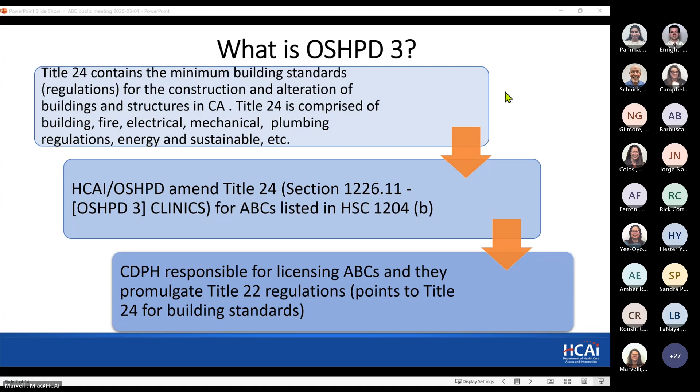Okay, I'm gonna turn this over to Clara Wu to recap stakeholder engagement so far. Okay, thank you. So we had 2 meetings with ABC representatives earlier this year, 2025. The first meeting occurred on January 7, 2025. During the meeting, we discussed ABC environments and the challenges faced building an ABC licensed by the CDPH.

We also discussed challenges faced with compliance with Title 24, Title 22, and the standards for birth centers set by the American Association of Birth Centers. OSHPD developed a Title 24, Title 22 comparison table, which we call the ABC requirement comparison table.

During the second meeting with ABC representatives on February 4, 2025, we reviewed the ABC requirement comparison table and discussed regulations that can or cannot be changed. We also discussed opportunities for a guidance document and ABC checklist to help the ABC providers and the local jurisdictions.

And we also conducted an email survey to birth center owners. The results of this email survey will be discussed shortly in the next slide. Thank you. So on February 19, 2025, we sent an email with 6 questions as displayed in this slide to 31 birth centers. We received only 5 responses. I am going to just go over a couple of the questions and results, and we will make this slide deck available after this meeting, so you may review the details of this result later.

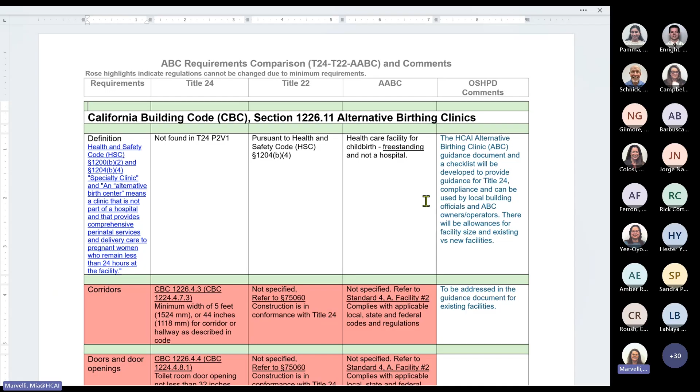And that's another part of our discussion today, how the guide can help assist design professionals and ABC operators and possibly local jurisdictions with enforcement for these regulations. I don't think I mentioned this earlier, but for primary care clinics and alternative birthing clinics, the local jurisdiction actually has authority for plan review, permitting, and inspection for certification of occupancy. OSHPD does not. So we try to assist where we can to clarify the regulations for the local jurisdiction.

Let me double check here. I'm going through my notes. Double checking some things.

So during our meetings with the ABC interested parties, and after reviewing Title 22, which again is the CDPH licensing requirements, and the American Association of Birth Center guidelines, we found that there were requirements that could be amended, such as the size of the birthing room, cleanup room, nurse call, lighting, garbage waste, medical waste, those types of things. We'll talk about those in a minute.

Additionally, when all of the clinic regulations were developed years ago, the Facility Guidelines Institute for Outpatient Facilities was used as the basis for the regulations. The FGI guidelines are nationally recognized standards that many states adopt. While we are not required to use FGI guidelines for outpatient facilities, they are a good basis for the building standards. And we do use those guidelines for the hospital regulations.

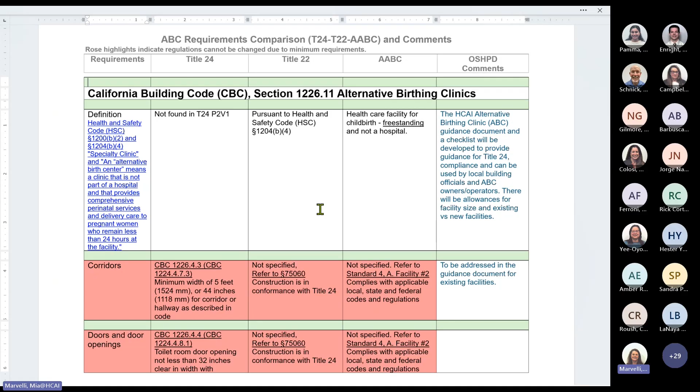I'd also like to note that a couple of the architectural features that you'll see today overlap with the other disciplines, such as lighting and plumbing fixture counts, so there'll be some overlap discussion on that. For the sake of time, I'm not going to go through all of the items, but I encourage you to comment today or send in specific comments by May 31st. Later in the PowerPoint, you'll see an email address to send those comments to. I'm going to scroll down here to windows.

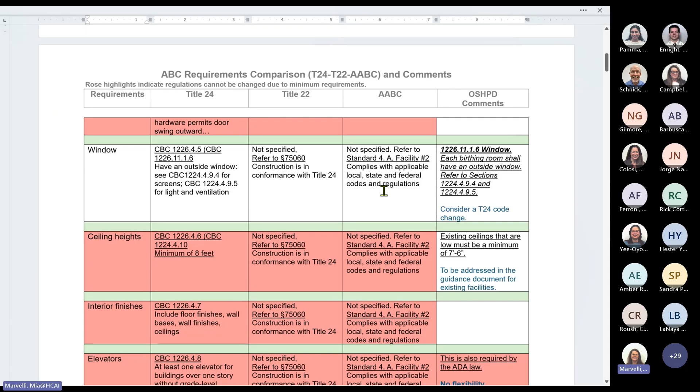So while we were comparing the various requirements, the need for a window in a birthing room may not be necessary, and we're going to consider this for a code change in the next code cycle. Later on in the presentation, I'll explain the code cycle. We also recognize that the regulations need to have some minimum requirements for new construction and repair. That said, we also understand that it can be challenging to remodel an existing facility to meet those minimum requirements.

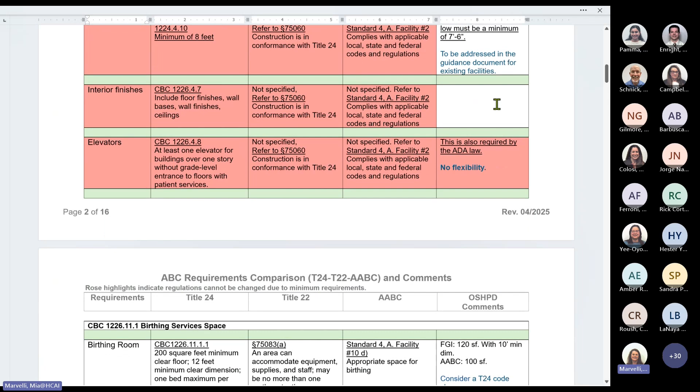So similar to the clinic CAN, which is on our website, OSHPD wants to issue a guidance document for alternative birthing clinics that has similar intent to allow some flexibility for remodeling existing facilities. A slightly lower ceiling height is one of the items that would not impact patient safety or care, so it could be considered somewhat flexible. Interior finishes and elevators is not something we'll touch on. Interior finishes is basically where you can and can't have carpet and what type of finishes on the walls, ceilings and floors is required for infection control.

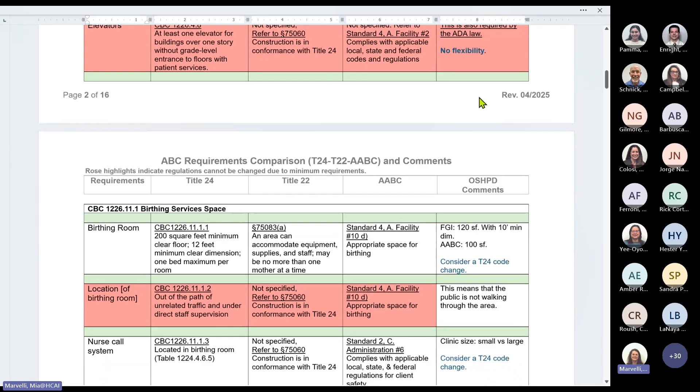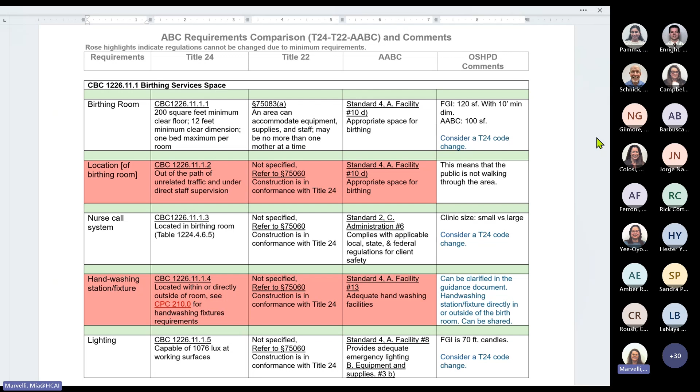Clara mentioned this already. Birthing rooms is obviously one that we will consider a code change for. So currently the regulation says a birthing room needs to be 200 square feet minimum with a 12-foot clear dimension. But Title 22 just says an area that can accommodate equipment, supplies, and staff, which is pretty open-ended. And then the AABC says an appropriate space for birthing. So when we looked at the FGI standard for birthing rooms, they recommend 120 square feet, which is quite a bit different from 200 square feet. So we will consider a code change for the birthing room.

To 120. Yeah. Location of birthing rooms. This really is just meaning that it needs to be out of the path of unrelated traffic and under the direct supervision of staff.

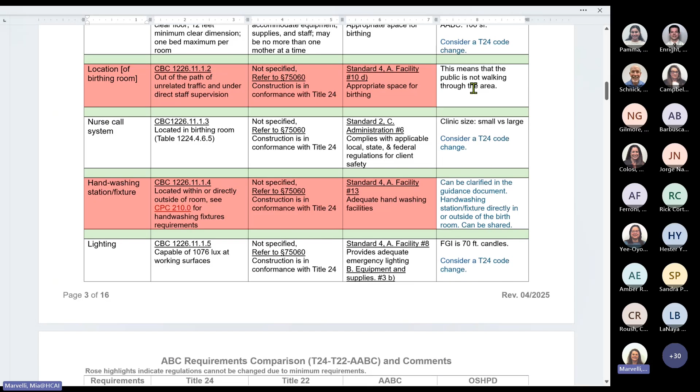Nurse call is another item we're going to consider as a code change. We recognize that a lot of these birthing centers are quite small, maybe 2 to 3 birthing rooms, maybe less than that. And so in our discussions, we're looking at perhaps we can have some sort of a communication device provided in case a patient is in distress, or if one of the midwives needs to call someone else for assistance. But it doesn't necessarily have to be a complete nurse call system like many of us have seen in a traditional hospital patient room.

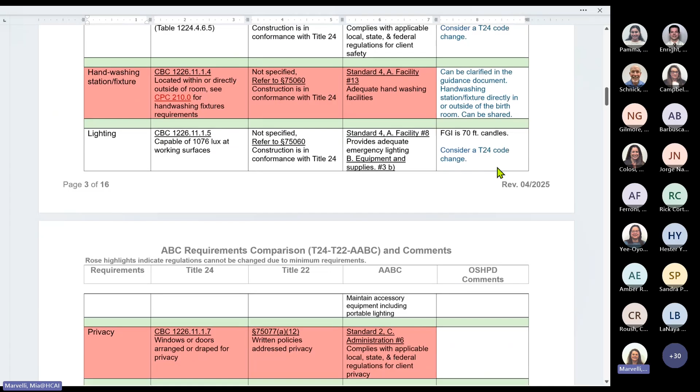Lighting we'll talk about a little bit later. This is another one where we may be able to reduce the foot candles to 70 rather than 100. Privacy is another item that just means you have to design things in a way that you're not exposing the birth room to an open area. Newborn care area is a carryover from FGI. And this area is actually optional, so we can clarify this in a guide.

And then exam rooms are not required in an ABC. And there's a lot of questions about consultation rooms. Obviously, an exam room could be used as a consultation room. But what we don't want is, if someone is only going to provide a consultation room and not have an exam room, we wouldn't want to have a higher standard for a consultation room. So we need to look at that carefully.

There's a requirement right now for a nurse station, but there's room in the code that this does not have to be a standalone nurse station. Sorry, I jumped ahead there. Oh yeah, right. There's a lot of areas that can be combined, such as a nurse station, reception, outpatient waiting room, medical records. All of that can be combined into one area if needed, and that can be clarified in the guidance document.

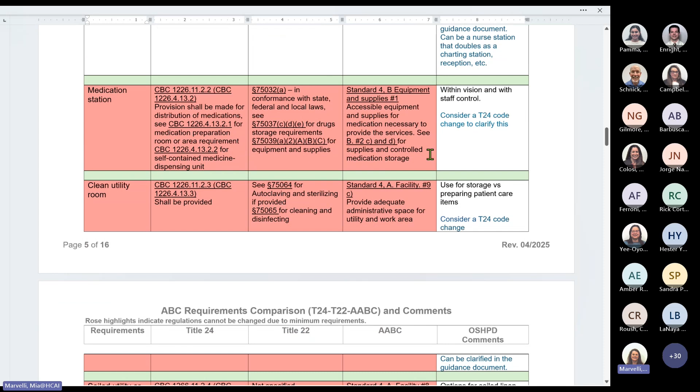Then there's a lot of support services like clean utility, soiled utility, garbage, soiled waste, medical waste, and trash. There's also offsite laundry and housekeeping. These must be separated to minimize the risk of cross-contamination. This includes separating clean and dirty areas. That said, if a small amount of housekeeping is needed in some of these smaller centers, then using a cabinet or a closet is fine. Same for clean utility and soiled utility. These can be small areas as long as they are separate areas.

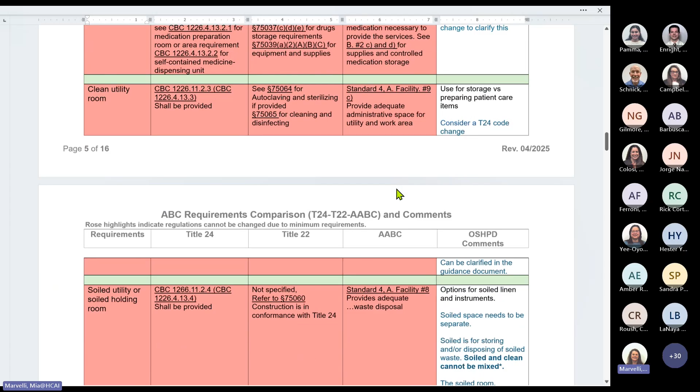Let me scroll down a little bit more. I'll hop back to crash cart in just a second. There's also requirements for ice making machine, nourishment areas, and staff break rooms. These can be combined and doubled as a staff break lounge. The ice making machine can simply be an ice maker in a refrigerator. We are looking at amending the public phone and drinking fountain requirements as they are a bit antiquated.

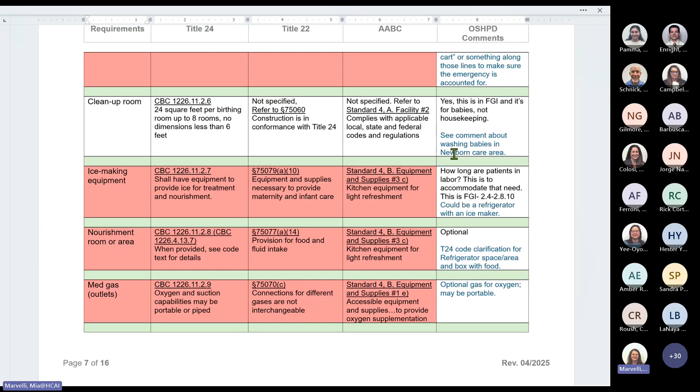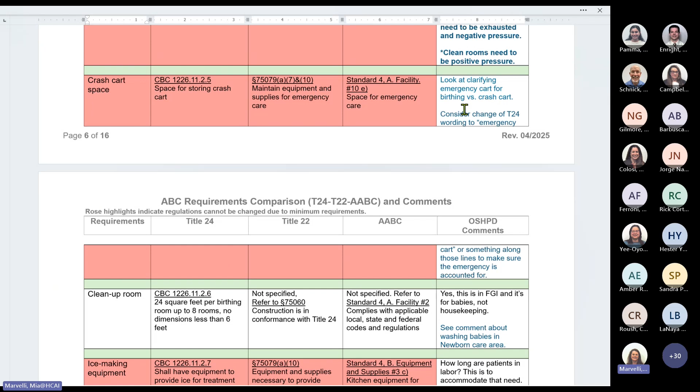I will hop back up here to crash cart. We've had some discussions, even though this is an orange, I think there's an opportunity here to make some changes. We can better clarify this as not like a crash cart in a hospital. What's needed is some sort of area where there's emergency equipment if needed.

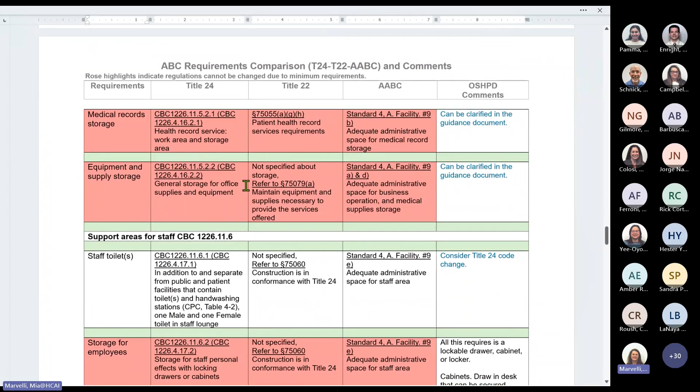So that gets us down to, we've talked about general support areas. I lumped those together. I'm scrolling down to the end of the architectural features. Next is mechanical. What I want to do now is open it up for discussion on any of the architectural features. And then we'll get into talking about mechanical, electrical, and plumbing.

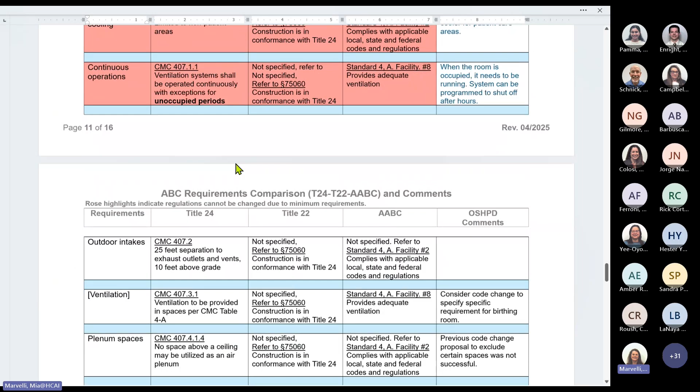Hi, I'm Larry Enright, Senior Mechanical Engineer in the BSU. I'll provide the plumbing and mechanical overview. So just a quick intro. OSHPD includes amendments for plumbing and mechanical to the model codes to make the California code related to healthcare facilities. Many of these amendments are based on guidelines either from FGI for plumbing or ASHRAE 170, ventilation of healthcare facilities, for the mechanical requirements. OSHPD adopts these guidelines based on the OSHPD designation, and for plumbing and mechanical amendments for OSHPD 3, these apply to all clinic types, with surgical clinics treated separately in our amendment package.

So feedback on these amendments is appreciated, as we will be looking into the applicability of these amendments for these lesser acuity functions. And then there are also minimum code provisions in the model codes that apply to ABCs and cannot be reduced by OSHPD. However, we can provide specific applications or recommendations in our proposed guide. Keep going. Right there. Okay.

So starting at the top, one of the amendments we have is outside air intakes. This looks for a distance of 25 feet from other vents or exhaust. This is just to provide additional safety for outside air. The model code permits down to 10 feet, with objectionable sources up to 25 feet. Down to the CMC table 4A, which is the basis for ventilation rates. 407 looks to have continuous operation. So we have already built in exceptions for unoccupied modes. So when the area shuts down, the HVAC can also be shut down. That's already built into our amendments.

The table 4A ventilation rates are also based on ASHRAE 170. Those are pretty much to make sure there's an additional layer for health related functions. This also addresses space pressurization for clean and dirty spaces. And that's really similar to how in a residential space a toilet, shower, or laundry room are all exhausted areas and provide a negative pressure. This table just kind of fine tunes what these airflow rates are supposed to be, and when those spaces are supposed to be positive or negative.

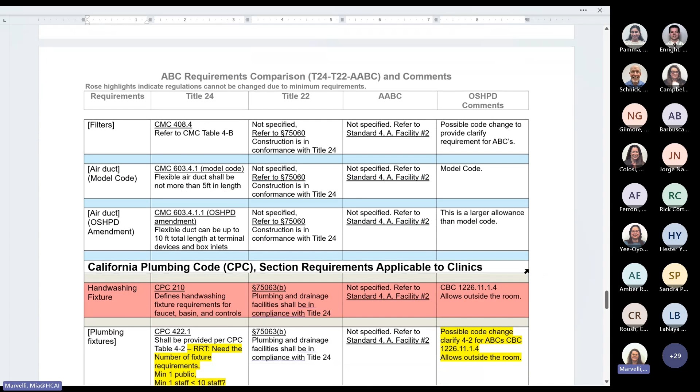Filtration, we have CMC 408.4. We look at specifically for the ABC space, but this is an area that will also address specifically ASHRAE 170. One other component that comes up is air duct. There's a lot of model code requirements. OSHPD does have an amendment that allows an extension of 10 feet for these flexible ducts at terminal unit devices. All the code applications with ABCs would also be looked at for the guide.

And then moving on to part 5, plumbing. Or do we want to ask questions? Let's do that, question on mechanical real quick. We have time. We have a lot of time, actually. So if there's any questions, please raise your hand from the mechanical side.

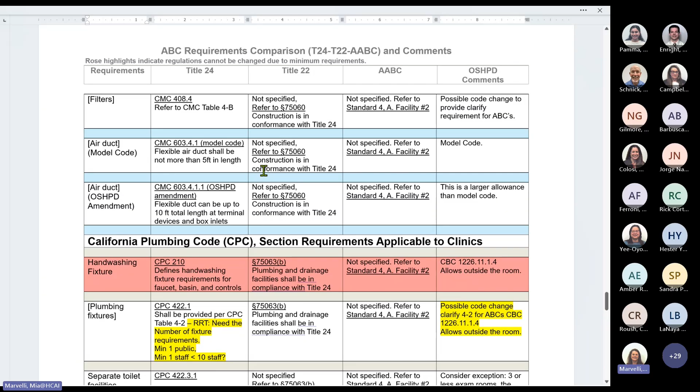All right, let me scroll down to plumbing. So plumbing is in separate part 5. Some of the main features also duplicate out of the part 2 building code. So hand washing fixtures. CPC just generally defines the fixture requirements, how to put together and base a hand washing fixture. Plumbing fixtures. This comes into play as we bring in the FGI requirements for having separate facilities for staff, patients, and public toilets.

And the main point right here is this one on a small ABC. This brings in additional fixture requirements. Basically, you have an addition of regular occupancy. For clinics, we have an exemption for less than 3 exam rooms. These will allow the public and the patient to share. However, the challenge with that is that the patient toilets are typically in the birthing room, private to that birthing room. So comments in that area will be helpful as we evaluate a fixture application for that occupancy.

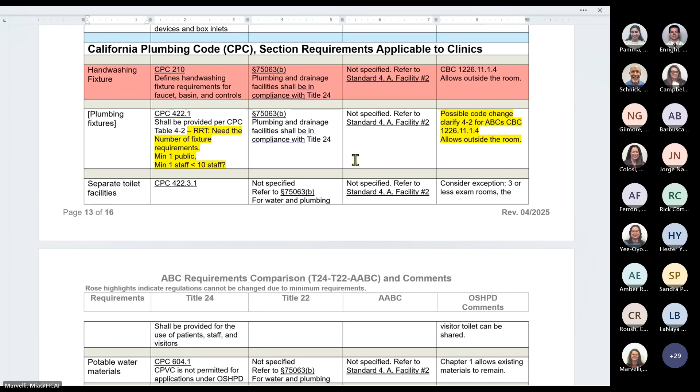Nancy is okay. Okay, a couple more pieces. Do you want Nancy to ask? Yeah, we can, you only have a couple more. We'll open it up for questions right after. Okay, thanks.

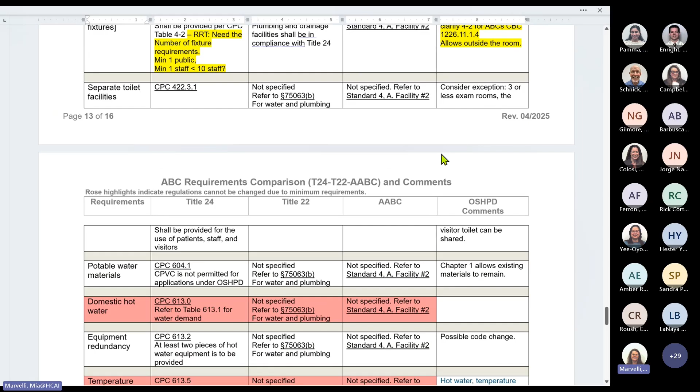So potable water, 604.1. CPVC is not permitted under OSHPD 3. This is kind of a tangent. So chapter 1 allows existing materials to remain if there's a rebuild, but for new construction, this is one of the state of California requirements. In addition, the sanitary drainage ABS and PVC installations, those looked at changes and those will be tied in. So those are marked in red.

Hot water distribution, we have CPC 613.5. This is one that's for scalding, and then also 613.6, looking at scalding issues and also legionella issues. So redundant equipment is required in 613.2 to maintain functionality. We've looked at clinics for smaller type facilities for water heaters that might be a little bit easier to change out. So any comments there would be good. And that's pretty much the main amendments related to OSHPD. So if there's any questions, we'll take those now.

Nancy, I unmuted you, so you could go ahead and unmute and ask your question. I'm not sure if you're speaking, but you're still muted. We got some hands up. I think we're okay. It looks like Nancy put her hand down, so I'll move on to Ezra. I just unmuted you, so you could go ahead and unmute to ask your question.

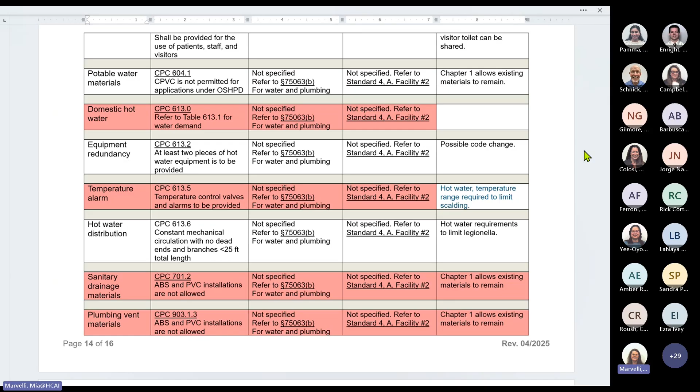Anybody else with their hands raised? Nope. No. Okay. All right. So we've got through architectural features. We've got through mechanical and plumbing. Jamie, we're going to turn it over to you to go through the electrical features.

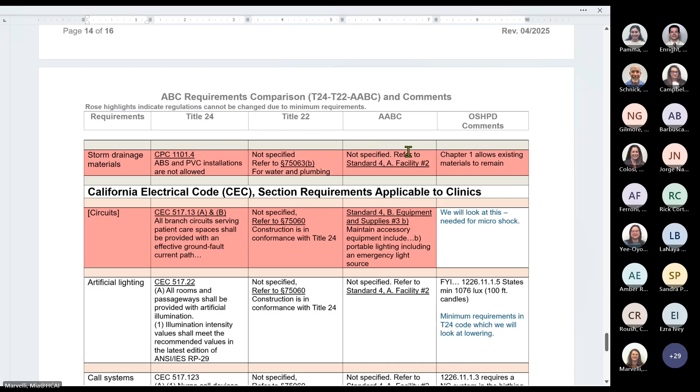There's only a few electrical items, and then after we're done with this, we'll still want to engage and discuss this table because we only have a few more slides left and we have plenty of time. So we'll start collecting those chat items as well. Jamie, I'm going to turn this over to you.

Great. Thank you. Hello, everybody. Jamie Schnick, Senior Electrical Engineer with OSHPD and part of the Building Standard Unit. So really just 3 items I'm going to go over that are included in the California Electrical Code.

Number 1 is the requirement that all branch circuits serving patient care spaces shall be provided with an effective ground fault current path. This article, California Electric Code 517.13 A and B, requires that, number 1, A, the circuits be routed in a metal raceway, and number 2, B, that all of the circuits have a ground wire.

So the code only looks at what is taking place and basically requires, when there's patients, that the receptacles and equipment adjacent to the patients be served by circuits that have these 2 grounding paths. This is something that the code requires, and it's something we could look at if it wanted to be relaxed.

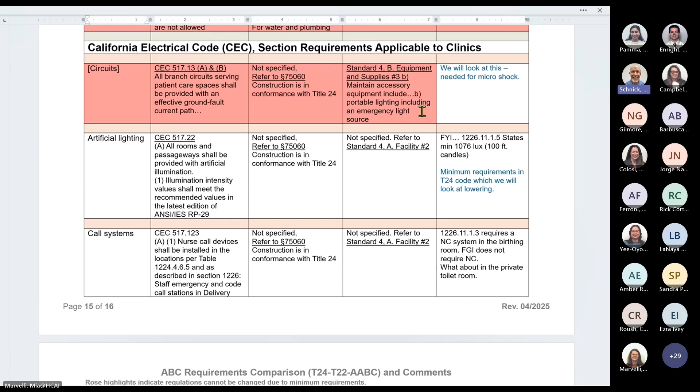And again, if there's no nurse station, this kind of becomes a questionable requirement. And I think that's something that the group is going to be looking into. Electrically, those are the 3 items.

Thank you, Jamie. I also just want to mention at the end of this comparison sheet are links to several resources that we utilized to put this together. And so right now, I'll ask, are there any questions relating to the electrical sections? And if there are not, we can move on to any comments we started receiving as well.

No electrical questions? Okay, all right. So did we receive any chat comments? Okay. Let's see. This one? The last one. Okay, Glenn, I'm going to read your comment. Thank you for that. I was surprised to see that the comparison table did not include a direct comparison of FGI for ABCs as the acknowledged national standard for health facilities. This may be advisable for consideration, particularly in the area of architectural mechanical.

Yeah, I agree, Glenn. When we started this comparison table, we were really looking at Title 22 and the AABC, which is part of the requirement in law. And then once we dove into this, we realized that a lot of the requirements in 1226.11 are actually based on FGI. So we will also consider what's in FGI when we're looking at making any of these changes. So I hope that helps answer that question. Is that the only one? Okay. And your comment is look at the current FGI, right? Will do. Can you respond to that? Thank you.